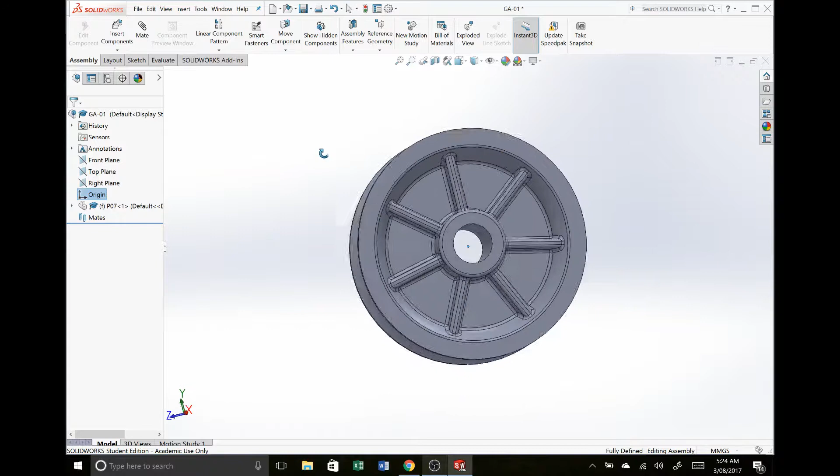So I'll say insert components, and I think the first part I will add, because it is a pulley after all, will be P07. The pulley wheel is what I'm going to drop in here. So let's go to P07. We will hit open, and I'm going to hit OK to drop that into that fixed position. So see how it's fixed, and my origins are all lining up quite nicely. It's all very centered. It's hard to be unhappy about that. I'm excited.

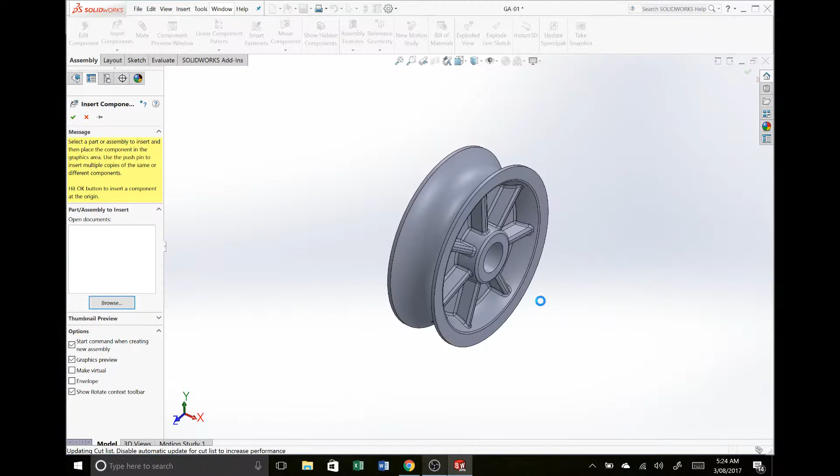Let's drop in next the rest of our components. The other parts we need to bring in are our subassembly, our P05 reinforcing plate, our P03 side plate, and our P06 bushing. We don't need to bring in P04, P02, or P01. They're already contained within the subassembly one. We insert the subassembly, we don't insert the discrete parts. Say open, and now I should be able to start dropping these parts down.

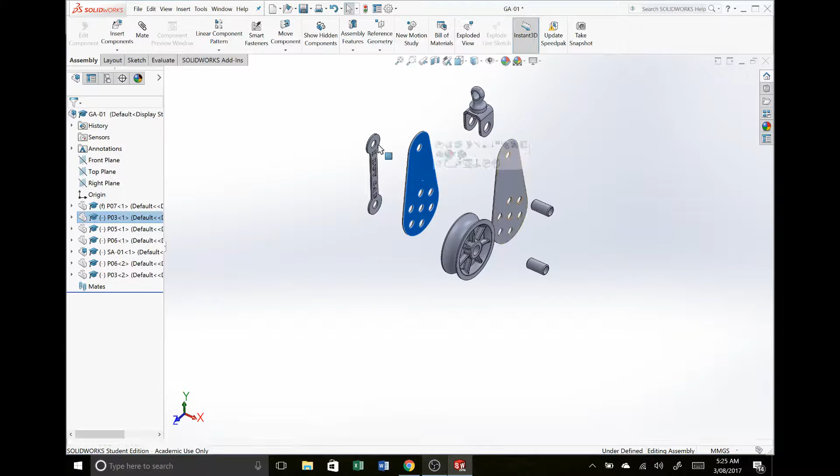So I'm going to drop a side plate over there, my reinforcing plate over there, a bushing down here, and my subassembly up the top there. Now I need extras of some of these parts. I could go insert components and go through that whole process again, or if I hold Control, I can click and drag any part to create a copied version of that part. So I'll use that instead. I'm just going to hold Control and drag these parts out like so.

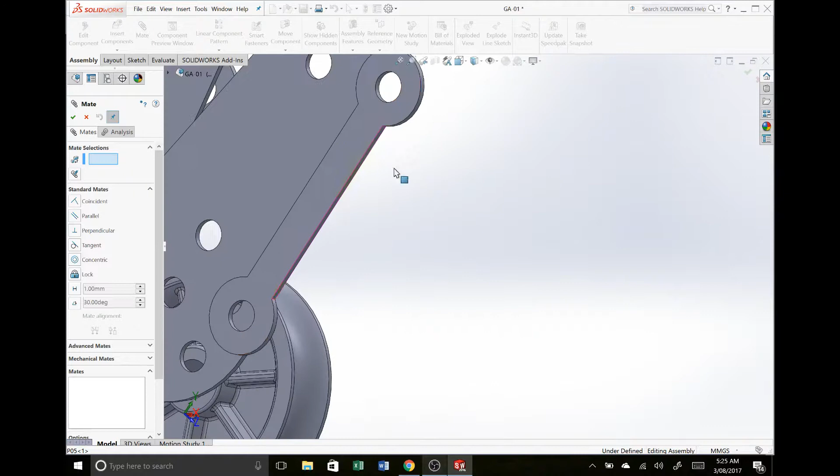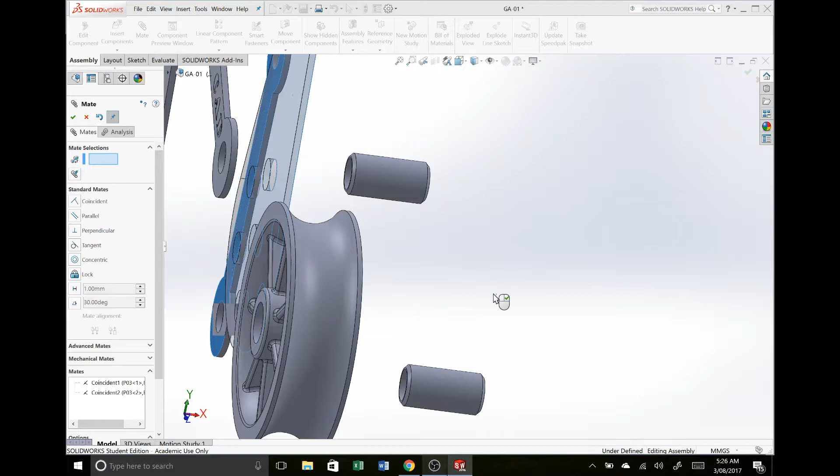Once again, we need to start putting all this together. We need to mate it. So let's go into our mates. It's good to be systematic. What I might do first is start putting mates between some of these surfaces. I can see straight off the bat that text is on the wrong side. That's pretty easy to get around. I select the surfaces that I actually want to be touching, and I use the mate alignment to flip the way they orient with each other. Now that's facing the right direction. I can do the same on this side, and drop that in. That's all looking pretty good.

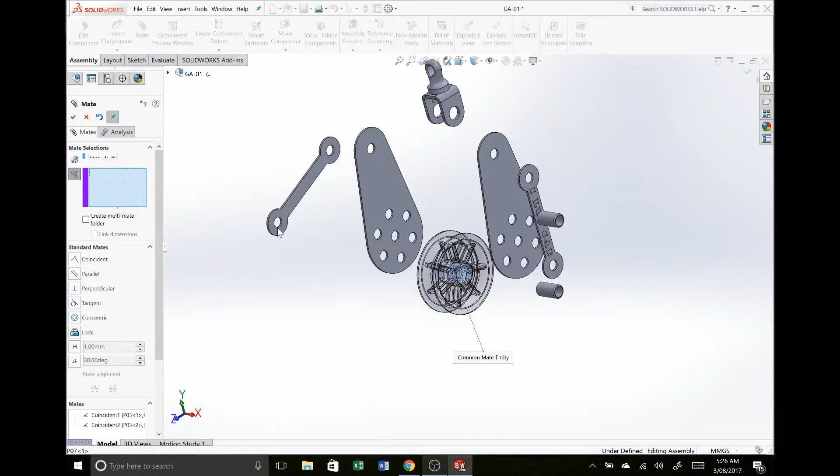The next thing I can do is start aligning these center holes. We can use a power mate where we mate a bunch of things off to one thing. For the common reference, I will select the center of my pulley wheel. That's the common reference for everything along that bottom hole. Then I select each of the other cylindrical surfaces that I want to be part of that power mate. The bushing down the bottom is part of that, and definitely both side plates, and both reinforcing plates.

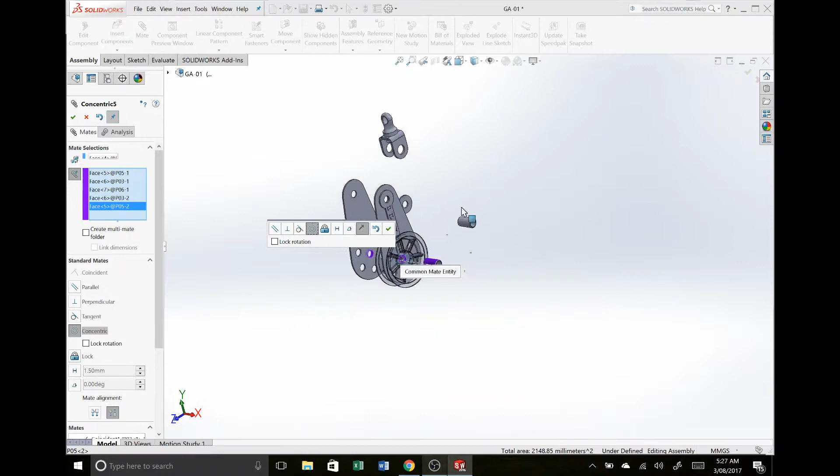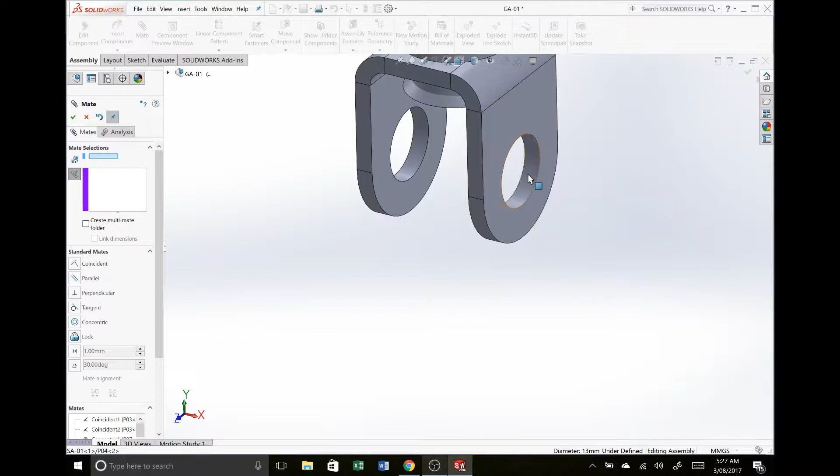So I've used one concentric mate to apply several across a whole assembly. It's all defined by that one center of the wheel. I'll hit OK. I'm pretty happy about that. I'll repeat that process for the top. This time I'll select the inside edge of my formed bracket as my common reference. The common reference will be blue, so make sure you are selecting it as the common reference. There we go. Then, like last time, select all the centers that we want to fall along the alignment of that hole.

Very good. Now what I forgot there is to include the bush. So if I want to go back and edit that, I can drop down the folder and look at my mates here. And we can see where it's added those concentric mates.

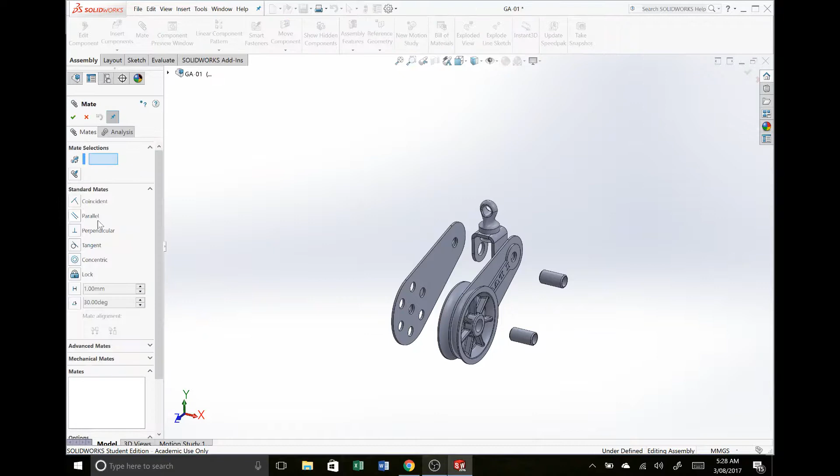So I'll go back into mate. This time I'll choose concentric. And I'll just select that bushing. Select the same common reference, just so that there's consistency across your part. You know, it's good to keep consistency. It can make things a lot easier down the track.

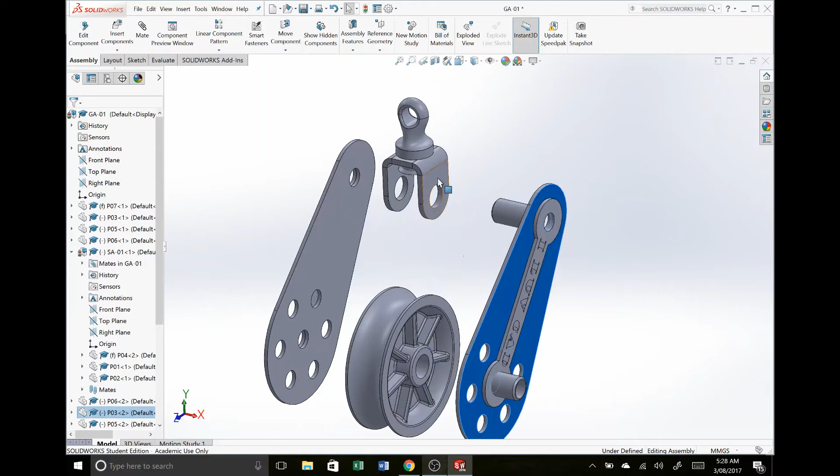And now I can see it's still sort of all over the place, but I can see that all those center points are aligned. And if we actually start moving it, they all kind of move together, albeit a bit erratically. So now I'm going to use my coincident mates to start mating off those surfaces. So let's do the inside edge of our side plate to the outside edge of our pulley wheel. If you want to confirm these, you can look at this section view and see which parts are actually touching each other. I'll insert that.

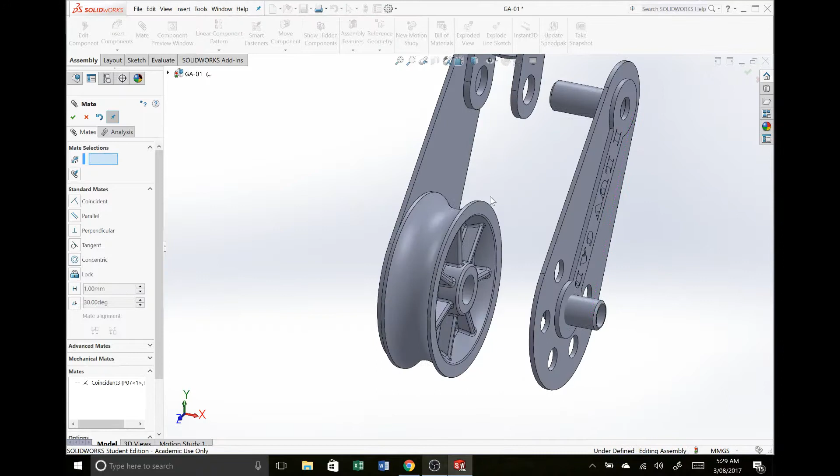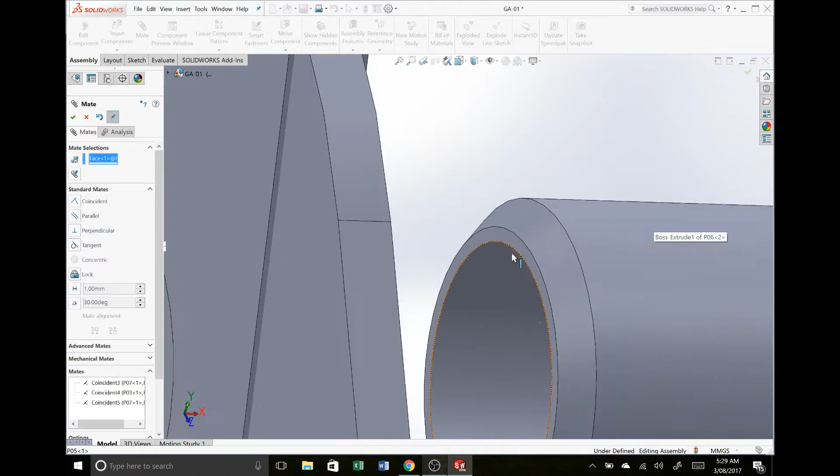I'll also do the outside edge of that side plate to that outside edge of my bush. And then again, outside edge of side plate to outside edge of pulley wheel. Hit OK. And then probably all I need to do now is bring that bush at the top inside of the part overall. And finally, just make sure that the edge of my formed bracket in that subassembly is against the edge of my side plate.

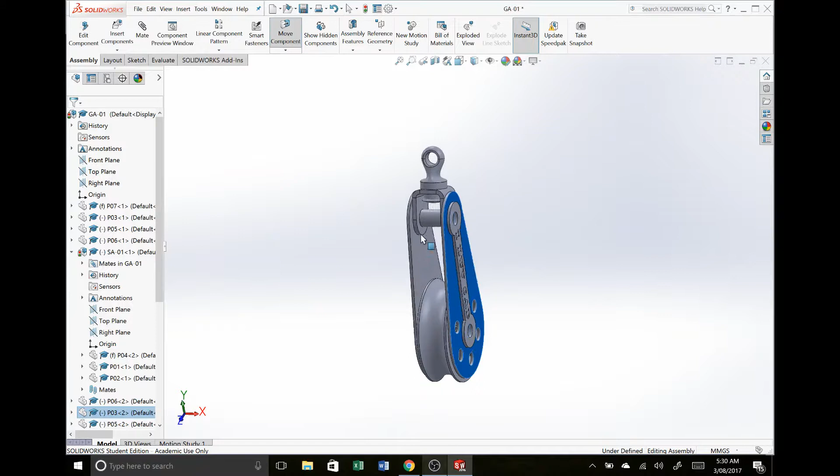So that's all looking pretty dang good. Let's just save that for now. We don't want to lose that work. And we can see all the parts are nice and in line. That's moving, you know, in a non-ideal fashion. We want to take that out. As long as it's moving, it's going to be underdefined.

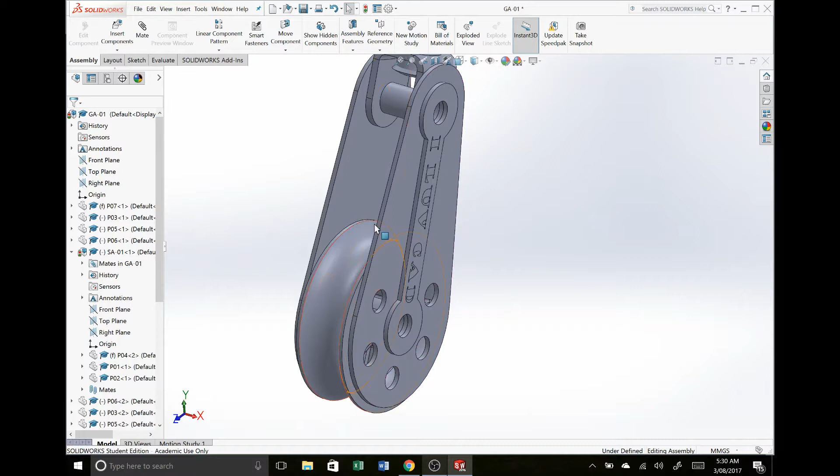And remember, for full marks, we have to make sure that all our parts say fully defined and all our sketches are fully defined. That being said, this text sketch, that will actually never be fully defined. So don't bust your back trying to get that working as a fully defined sketch. It's just not possible. Okay, so we're looking pretty good. We want to take out that movement.

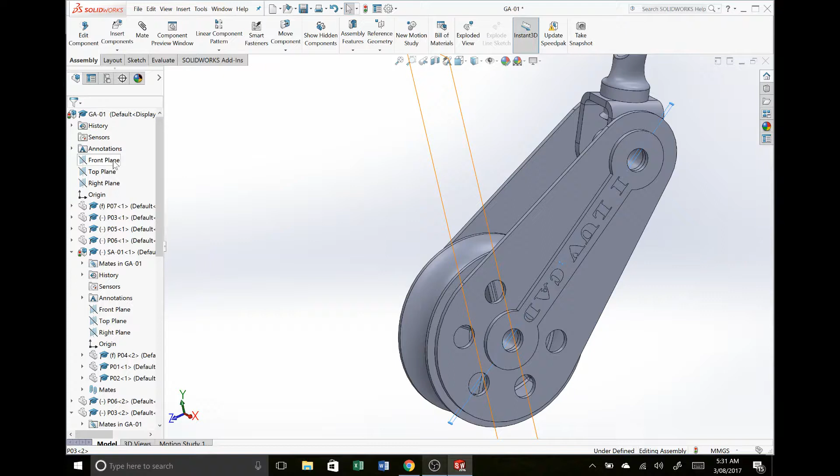I think the best way to do that is to pick, say, this side plate and stop it rotating. So if I click the side plate, it will highlight in my feature tree. So I can see here P03 is highlighted. I can grab the front plane from that part, scroll up, hold Control, choose the front plane of my assembly, and what I'm going to do is place a parallel mate between those two parts.

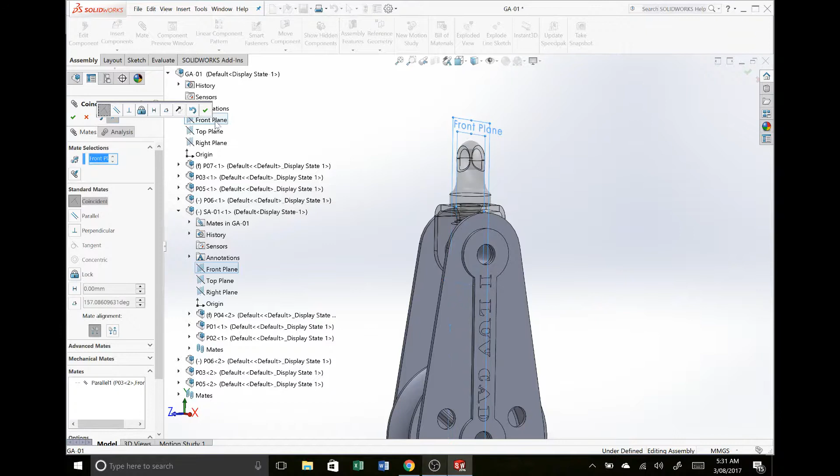And that means that now if that front plane in my part is always going to be parallel to the front plane in the assembly, there's no way it can spin the way it was anymore. That's going to be limited by that mate. I'll do the exact same thing for subassembly 1. I can drop down this feature tree from here. I'll just tidy it up there. I'll open subassembly 1, grab the front plane, hold Control, grab the front plane of the assembly, and place a parallel mate between them. Hit OK.

Now, I'm still underdefined, and I can figure out what's underdefined by looking at what's got the minus sign. Now, in both cases, it's the bush that's underdefined. And that's probably because it's spinning. Remember, it's only defined by a concentric mate. So that means the bush is spinning around.

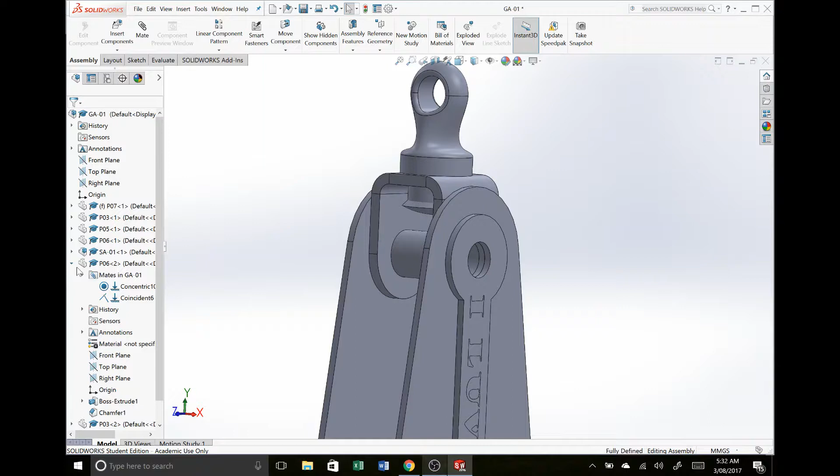If I hit the drop down, I can see all the mates that are defining that bush, including its concentric mate. I can right-click that concentric mate and I can lock its rotation. And that part should then become fully defined. I'll repeat that for both of those bushes because they're both underdefined due to the fact that they are spinning on their concentric mate. So that's lock rotation. Right-click the mate and lock rotation.

Now, as this goes together, we're seeing once again that this doesn't look a lot like this. That's because we need to tweak a lot of dimensions in here. Something we're not going to go over in the video. That's what we do in our class time. And I give you a lot of assistance in letting you know if you're looking like you're on the ball or not for that. Things to look for is compare the size between two parts.

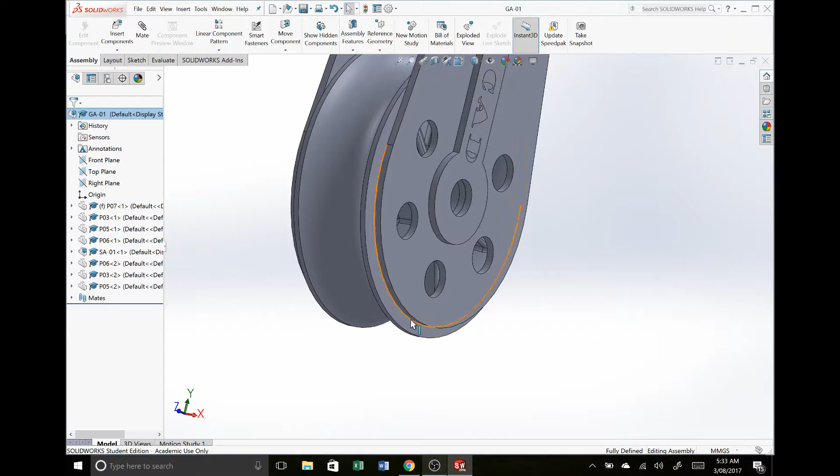For example, here the bottom of my side plate is a lot smaller than my wheel. I would want to go to the side view and I'd probably see quite quickly that that's not the case. In fact, it should be the opposite. So, just look out for those details, go through with a fine-tooth comb, and keep your eye on it. Otherwise, that's looking pretty good. We're at a fully defined assembly. We've got all our parts in there. All we're missing now is our screws and bolts.

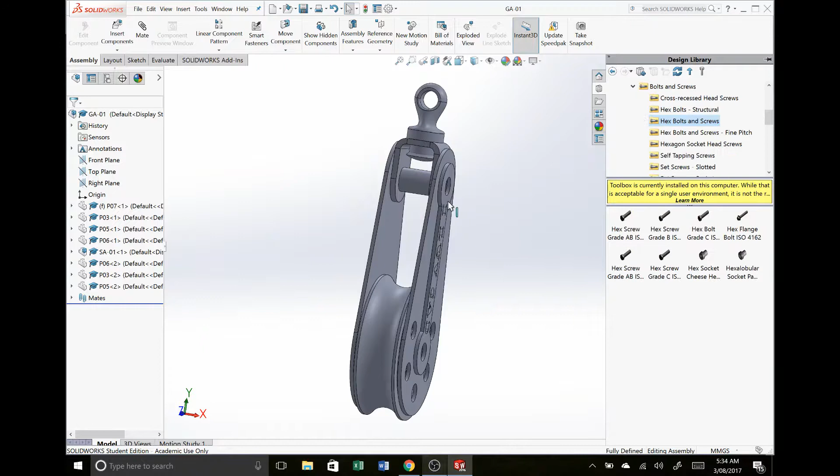So they should live in our toolbox, which is part of our design library. So I've clicked Design Library. I'll come to the toolbox, and I'll say Add-in Now. Very good. I'll come to my ISO parts. I'm going to go to bolts and screws, and I'll go to hex bolts and screws. I will probably grab that grade C. That seems to be a fairly standard one.

I'm just going to quickly, in my view pane, before I start dropping anything, reset my view, go to isometric, and I'm going to look at the original, and I can see which side the nut and bolts are on. So I can see that the screw inserts from the far side. So I can rotate around, so I'm looking at that far side.

And then I will select my toolbox again, just by clicking that. And all I have to do is drag and drop components from the toolbox. So I'll drag and drop. I'll hover near the circle where I want to drop it. It'll give me a preview, and I can let it go.

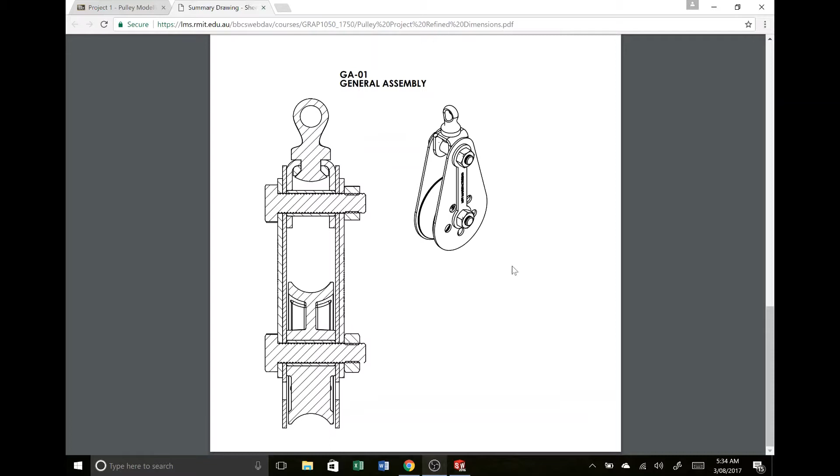I'll give it some time to think, and I should see a dialog box appear where I can tweak the settings and the size and the geometry. So it's set to M8. We know from our drawing that it's actually an M10 bolt, so I'll change that size from M8 to M10.

And as for the length, I just want to make sure it's long enough to poke out the side, fit a nut on, and still have a little bit of thread left over. So that 45mm length looks fine. In our drawing, the bolt doesn't have this washer face, that little thing I can see in there. So I'm going to go to Finish, and I'm going to say No Washer Face.

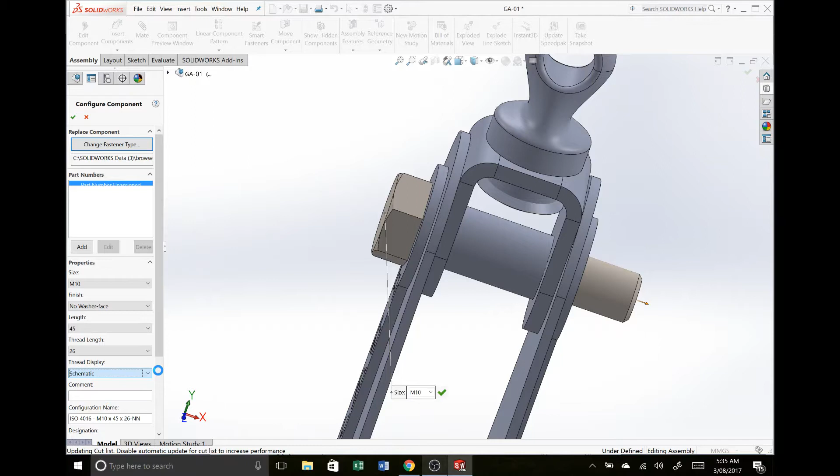Now, for thread display, simplified is fine. However, it'll look a lot prettier if we put it on schematic. So let's just do that for fun. Look at that. It looks like a real screw. That's excellent. And let's hit the green tick for OK. And there is our first screw.

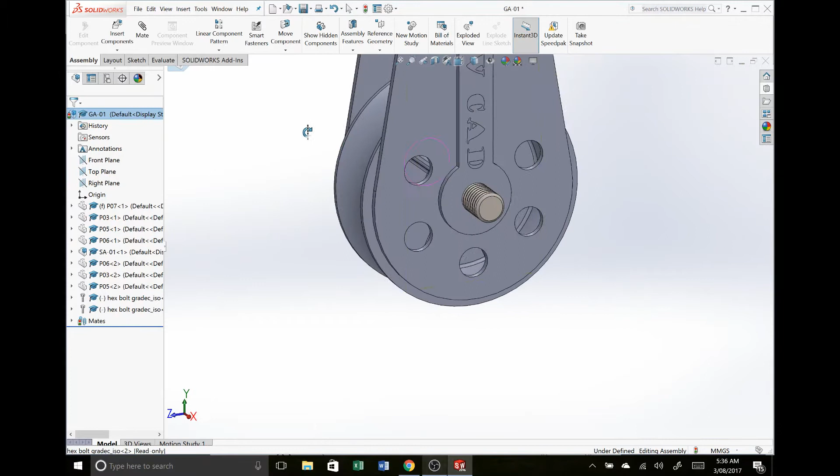And we can see now I can drop as many of those as I want. I'm just going to do one more down the bottom there. And then hit the red cross to hop out of that feature. And I can see now I'm no longer dropping screws everywhere I click. Finally, come back to your toolbox.

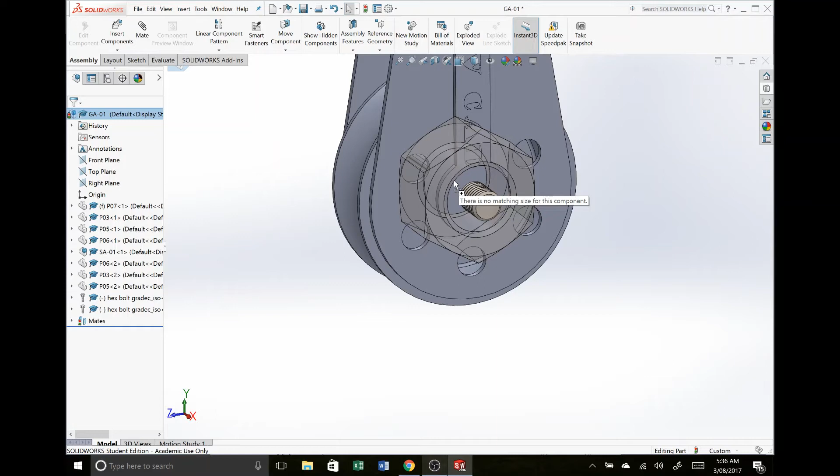We want to come back to that ISO folder, and we want to choose nuts this time. Let's go to just plain hex nuts. Hex nut grade C. Drag and drop onto our component. And again, we wait for the dialog box to appear. M5 doesn't sound right. Let's boost that up to M10 so it's the correct size. We'll hit our green tick for OK.

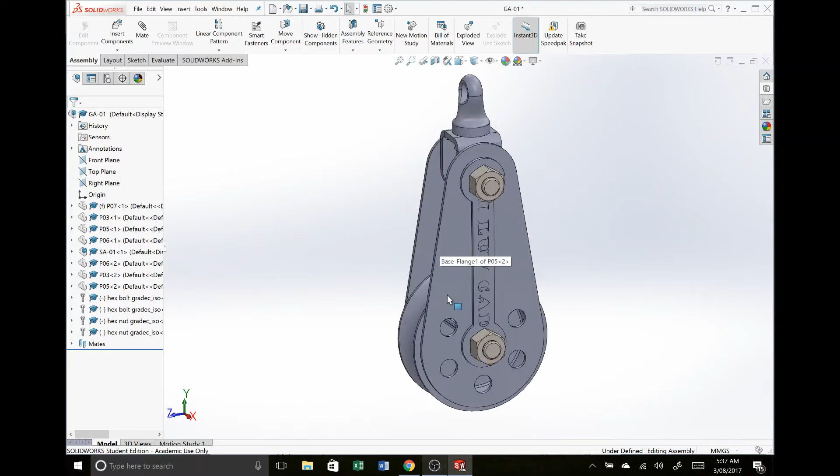And then that will allow us to drop another nut up the top. We can again hit the red cross to hop out of that feature, and we'll see that now we've inserted another nut. However, we've also inserted a problem. What a sly little mistake that was. The problem is our model is once again underdefined. And we can see that it's because these are underdefined.

And like the bush, it is because they're using concentric mates and they are spinning on those mates. Both the nut and the screw and the bolt, that's all spinning. So let's lock that out. We should be able to do it quite simply by coming to our mates, where we can see the concentric mates that were automatically added by those toolbox features. And we'll right click and we will lock rotation on each of those mates. That will stop the part spinning, and it will mean that our part will be fully defined.

Now, lock rotation isn't always appropriate. Sometimes you'll want it facing in a certain direction, not just randomly locked in space. When you want it facing in a standard direction, that is when you should use something like the front plane or the right plane, top plane even, to create a parallel mate to another part to dimension that angle or that position you wish it to sit at.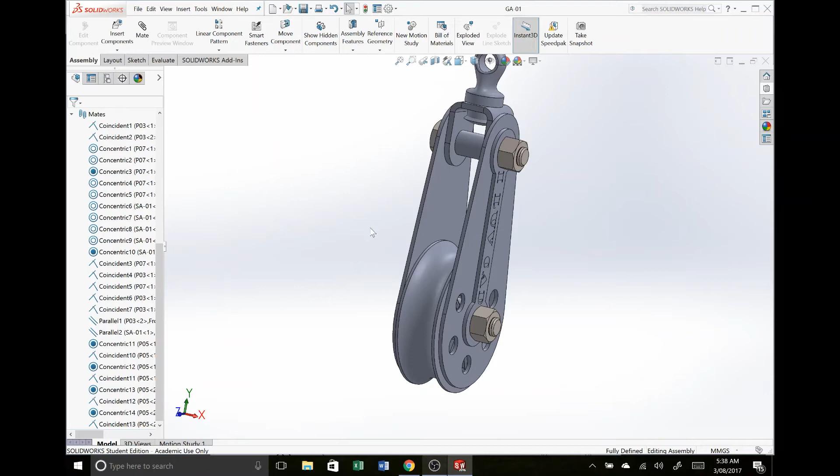So here we are, we've got a general assembly and it's fully defined. Now this model is at a point right now where I could submit it and that part would pass, but it wouldn't get a very good mark. There's a lot of incorrect dimensions there. There's parts that are clashing. There's a lot of groundwork left to do on that, which you're going to have to figure out yourselves if you haven't really done that in the classes.

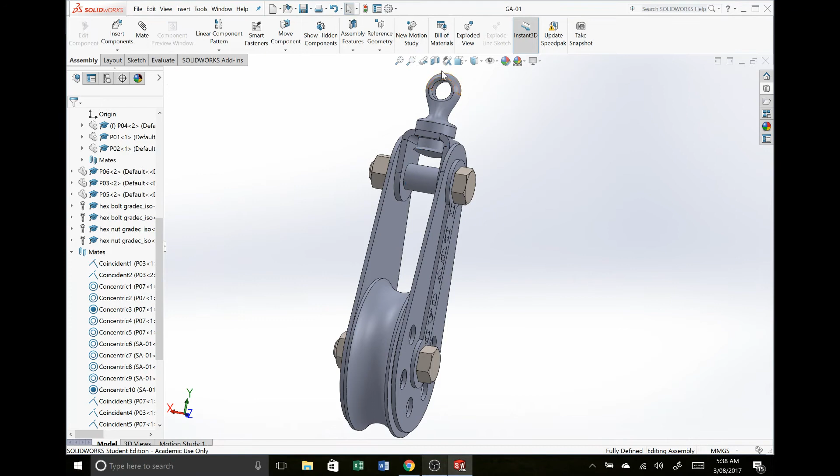So come back to your drawings. Look really closely at all these dimensions. Check the dimensions you've got. Look very closely at this section view. Compare it to your section view. You can create a section view quickly by turning on the section view tool. You can use these arrows and angles to drag and manipulate that section view through your part.

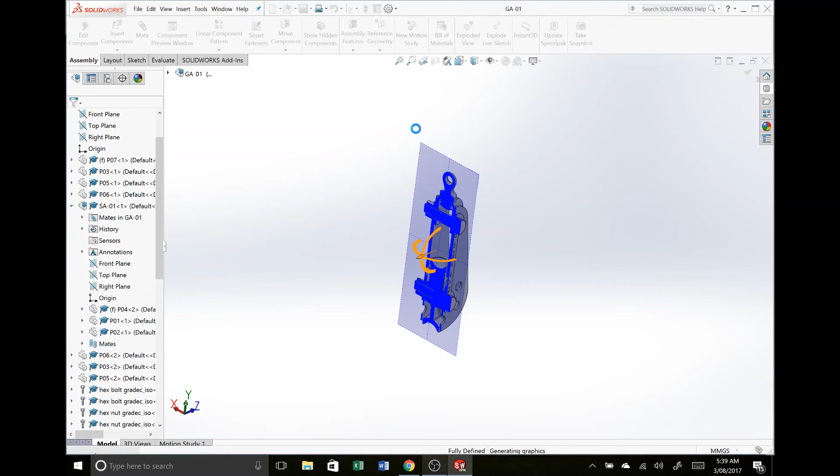Because if you've modeled it the same way we've done in all these tutorials, yours will be nice and centered around the origin. That makes it really easy to use this feature. We can just place it on the front plane, hit OK, and we get a nice section view down the very center of our part. And now I can compare this section view to the section view in that drawing document.

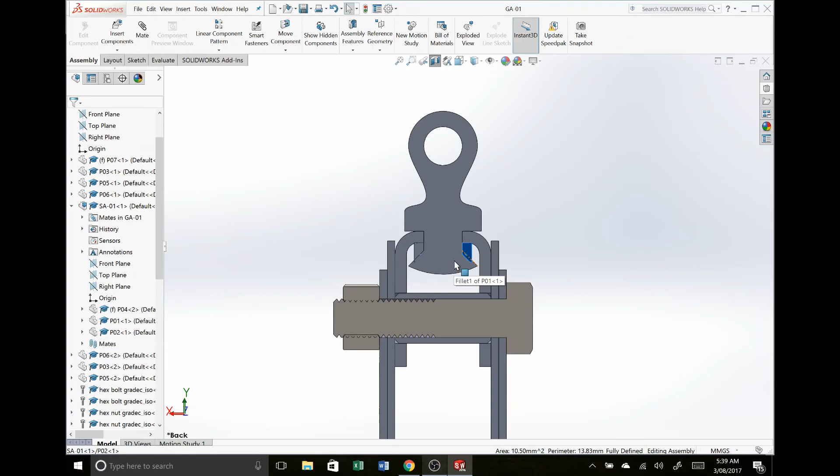For example, if I look at this detail, that all fits quite nicely. If I look at my detail, it's all overlapping. There's some wrong dimension in there that needs to be fixed. Anyway, that's the end of week 3. We've had a look at how to get those assemblies together.

Next week will be week 4. We'll be submitting these at the top of class. You should have all of this done before you get to class. There's not really any excuse not to be ready to submit at the very start of class. We'll be moving on quickly to the next assignment and looking at what we can do for that. Very good.